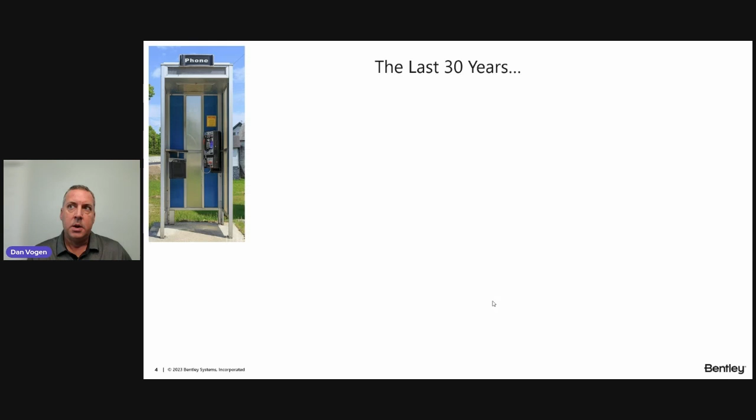Looking at myself professionally over the last 30 years, I've gone through every single one of these communication devices, and how we've got so much power at our fingertips today, how we're able to communicate with the world so seamlessly, and what we're able to do with the computing power in our pockets.

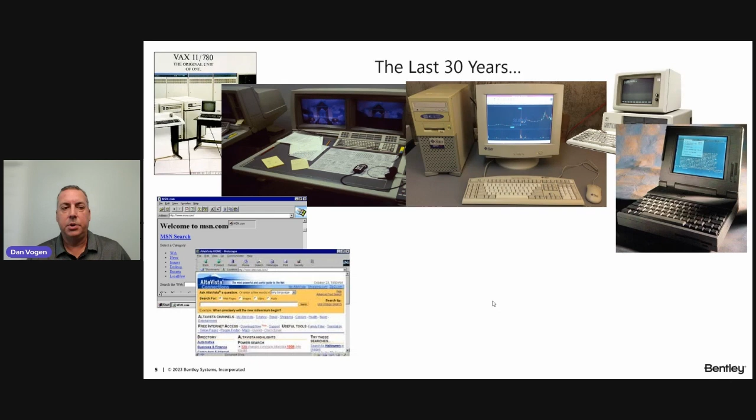From a computing power standpoint too, I've gone through the evolution of all these systems, from working on VAXs originally and different types of workstations, to the first PCs and first laptops, into the internet and email, and now what we do today with Teams and conferences like this. The evolution has been incredible.

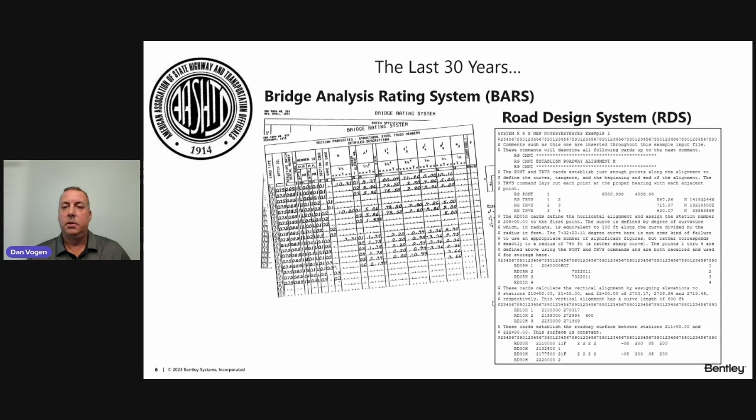From a professional software standpoint, I started as a developer working on AASHTOWare products—first one was the bridge analysis rating system. Today we look at 2D plans, 3D models, and digital twins, but 30 years ago we were working with textual input to define a single beam in the structure, parapets, and overall spans, and then using that for bridge rating. Similar on the road design side, using textual input to define alignments, curvature, and points of tangency.

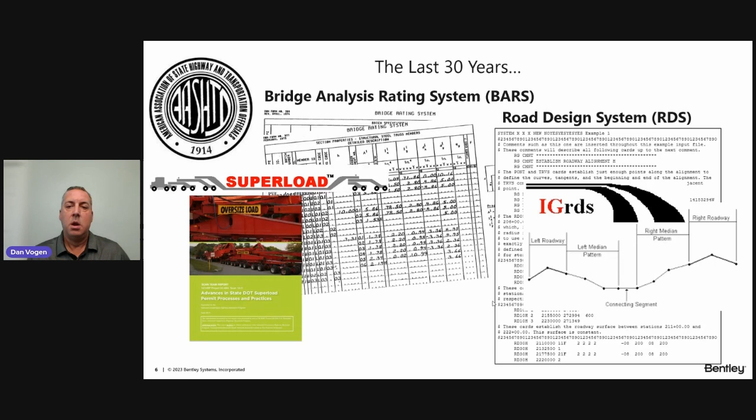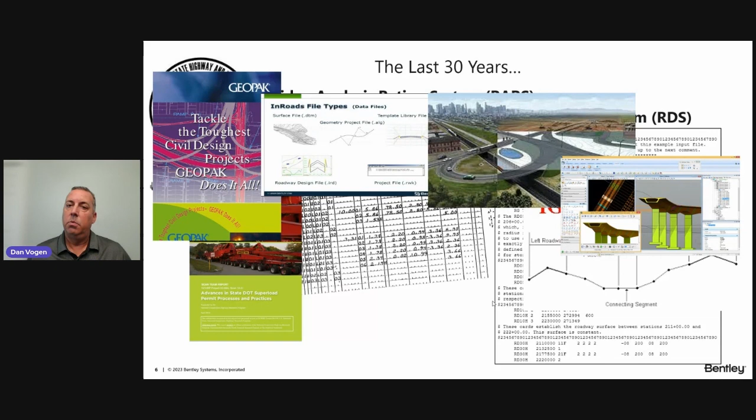Then we got into working with things from an interactive graphic standpoint, where we could see cross sections and side slopes and understand a little more. We combined those things together and kept iterating to be more interactive, more graphical, and more model based. Now we see really detailed 3D models that we work with today.

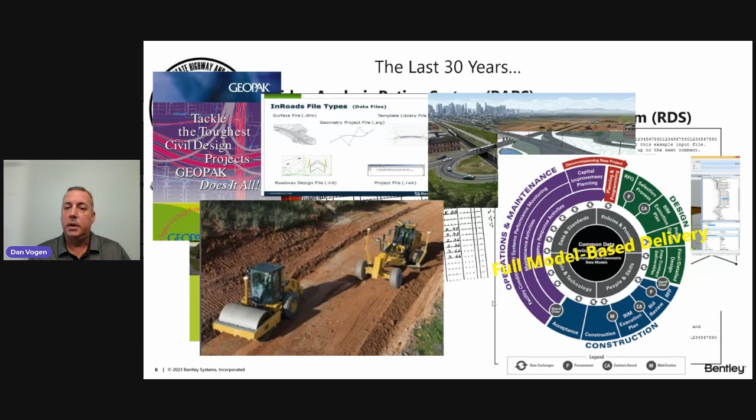That's allowed us to work with things like automated machine guidance and automated control of construction equipment out there. Now we see the Federal Highway Administration really trying to push this along, moving us into full model-based delivery, where the entire life cycle—from design to construction to operations and maintenance—becomes a full model-based future.

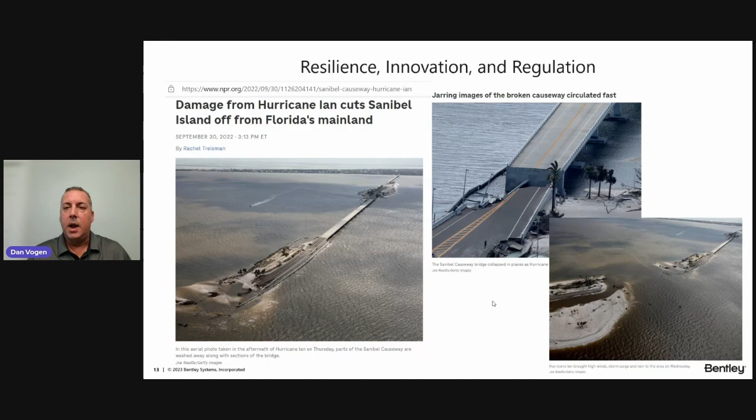We saw in Southwest Florida, late September of 2022, Hurricane Ian came through, massive destruction. Here's some pictures of the Sanibel Causeway. It's a 3+ mile bridge that connects the mainland out to Sanibel Island. There was about 16 feet of storm surge in this area. The structure was resilient overall, but there were 3 spans that were adversely affected by the storm, and the island was cut off from road transport.

The amazing thing here, with the resilience and the innovation that comes into play, this is just from a remediation standpoint: the hurricane came through September 28th. Two weeks later, October 12th, those spans had been repaired, and those structures were open to emergency moves. And 3 weeks later, totally after the storm, the causeway was open to the residents there, not the general public overall.

It took so many people. They said 100 crews worked around the clock. You look at the amount of dirt and rock and 4,000 tons of asphalt that were brought in. But in time of crisis, we found that way to innovate. We found that way to get past regulation, past funding processes and procurement, and we just made it happen. So we can do it when we want to.

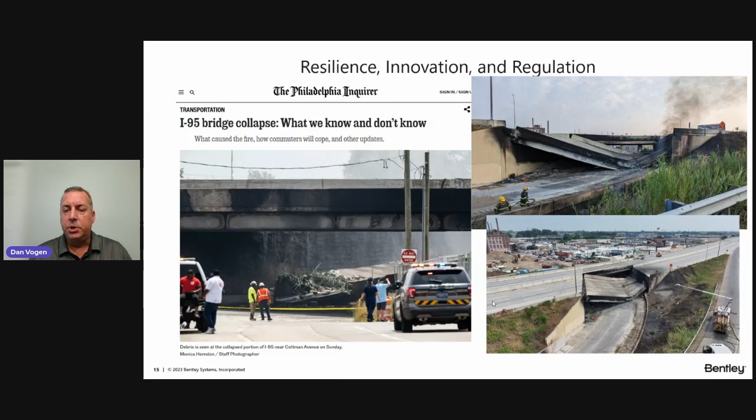Just a similar kind of example here. We saw in Philadelphia the I-95 bridge collapse, and there was a tanker truck that started on fire under the bridge. We lost that structure. June 11th of 2023 that happened, and in 12 days that structure was open.

It wasn't open in its original form. It wasn't all the beams. It wasn't the same design. It wasn't a long-lasting solution necessarily, but it allowed us to deal with this area that has 160,000 cars cross through that area every single day.

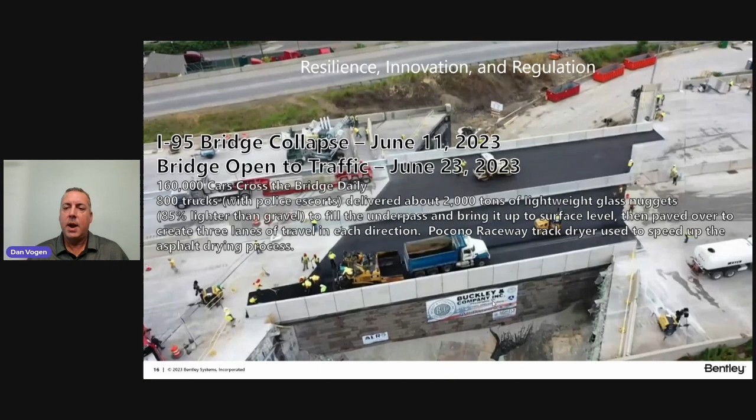And again, it was the extent of work and coordination and collaboration and planning and resilience that would go into this. Different methods with lightweight glass nuggets, and using the Pocono Raceway track dryer to speed up the asphalt drying process. So we can do things more quickly when we're really driven to.

When we look at trends around sustainability, there's a really interesting organization called the Ray, and they're looking at all kinds of things that we can do in our roadways to better prepare for the future, to be more efficient, to be more energy, to be more nature friendly. So one of the big things that they're touting, you see in the picture in the bottom left there, is to try and use the right of way inside of interchanges to install solar developments.

And they say that if we looked at doing that, we would be able to power 12 million electric vehicles a year by the power that could be generated by putting solar developments inside those interchanges. They light them up. They say it's safe.

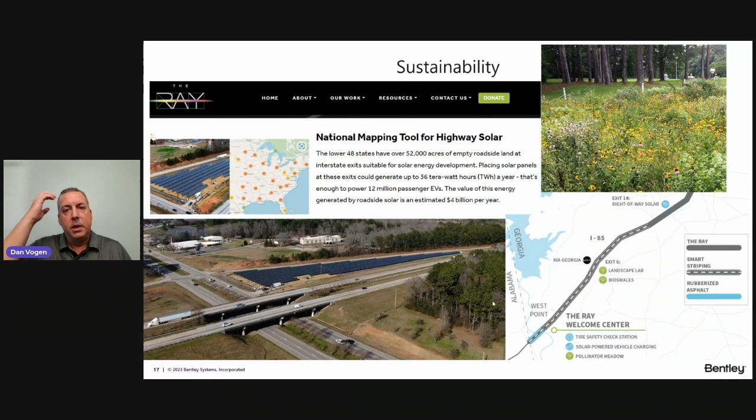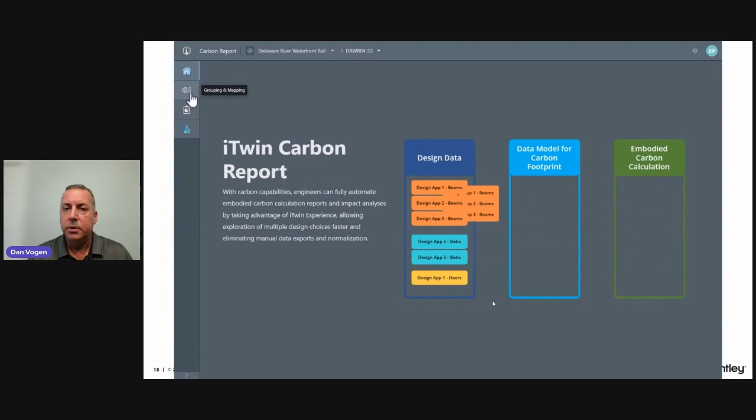And that's a good way to look at land that doesn't go to use today. They've got several other things for pollination meadows and what we need to do with better pavements and being more sustainable overall. We look at greenhouse gases and what we should be doing and what opportunities we have to take into consideration when we look at new designs.

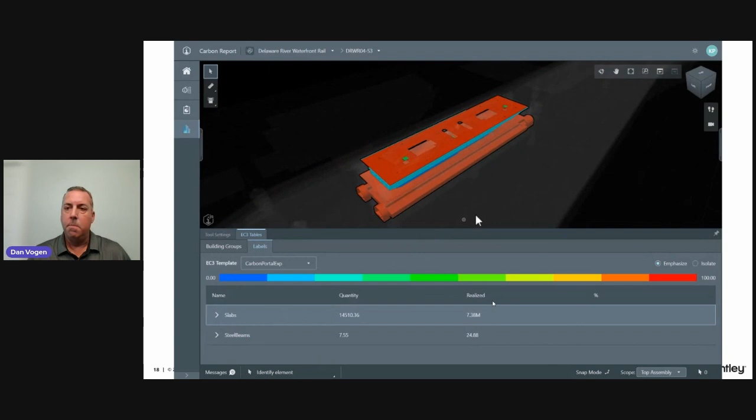I know we've been working with an organization called One Click LCA Limited, and we're able to take models and see the impact of the materials that are used, the design that's used, and identify exactly the extent of greenhouse gases that come into play because of that specific design consideration, whether the form or the materials.

Looking further out into the future, I think that we'll see heavy civil and infrastructure impacted by a couple main considerations: one, new designs for livability or sustainability or resilience, and then new methods for how we address those designs and the construction that has to come into play. Let's look at a couple examples here of how far the new types of designs can be pushed forward, how much we're going to be challenged.

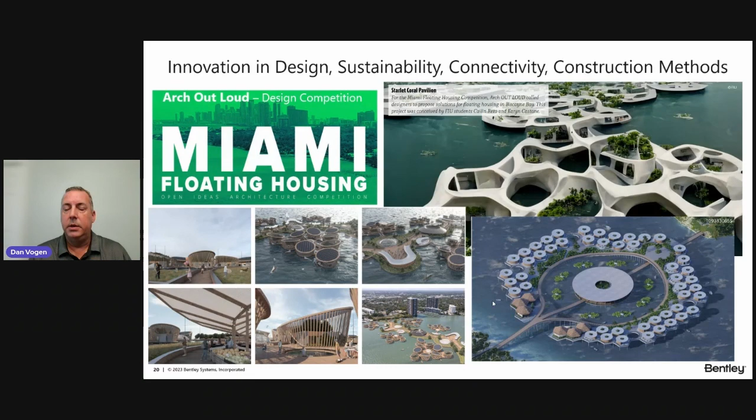These pictures are all from the Arch Out Loud design competition, and they put on different design competitions. This specific one was for Miami floating housing, and they challenged participants to look at what could be done to put housing in this water area of Miami. You can see all the different crazy designs that come into play. This will result in so many changes that are required in how we deploy our equipment, what equipment's needed, and what we do with the building materials and building methods. And that's in an area close to home for most of us, Miami in the U.S.

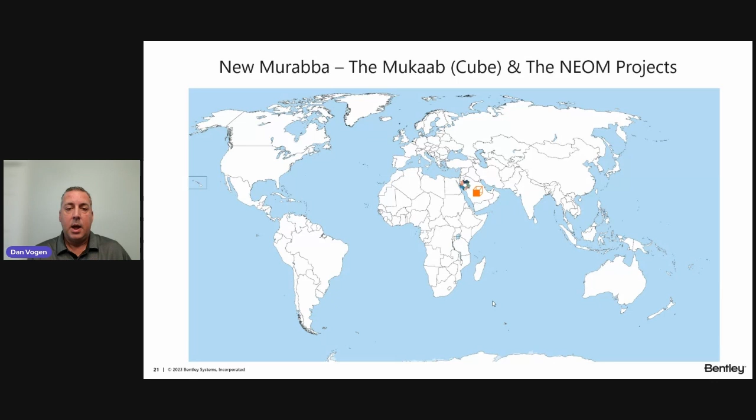We see some really, really crazy things going on in the likes of Saudi Arabia, a couple huge projects there. I want to share a little bit there and see how that will go and challenge us. So I'll let this one video play, and then I'll come back in and show a couple other projects that they have going on.

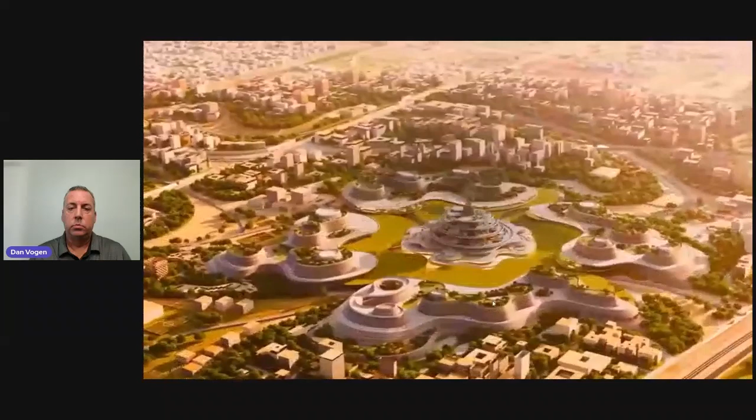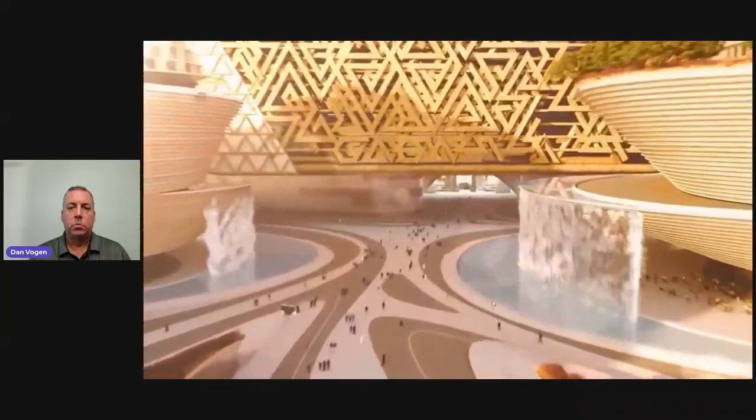Introducing the new horizon for Riyadh, a new icon, the Mukaab, the world's first immersive experiential destination. A gateway to another world. Step inside and it's unlike anything you've ever seen, at a scale that's unprecedented, big enough to hold 20 Empire State Buildings, where you and those around you.

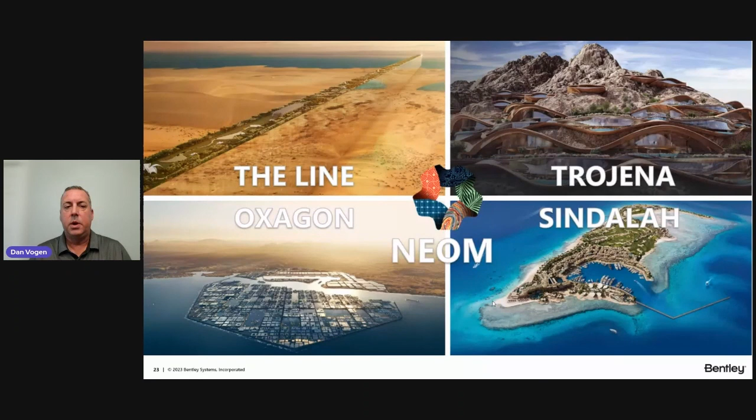So you can look up that project, Mukaab. I mean, crazy. They're thinking about 20 Empire State Buildings in that space.

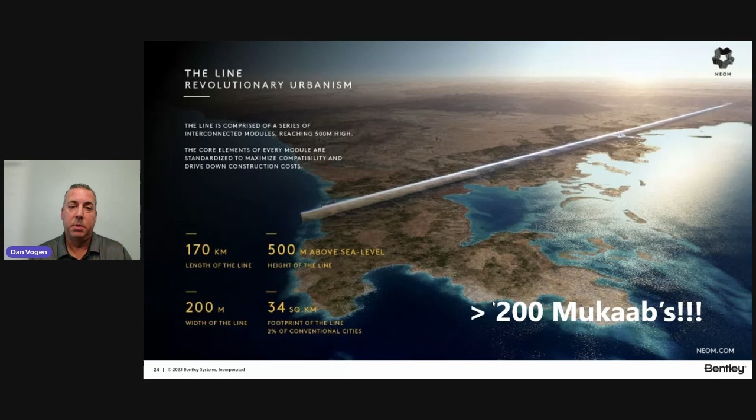But NEOM has several projects going on in Saudi Arabia. One they call the Line, and the Line is 200 meters wide, 500 meters tall, and goes on for 170 kilometers. If I did the math right on this, that will be over 200 of those Mukaab cubes. This is massive. We look at what they try to do, and they try to put all kinds of business and residential and lifestyle activity type capabilities inside of these individual modules, limiting the amount of time to travel for anything that you would want to do, but this goes on for 170 kilometers.

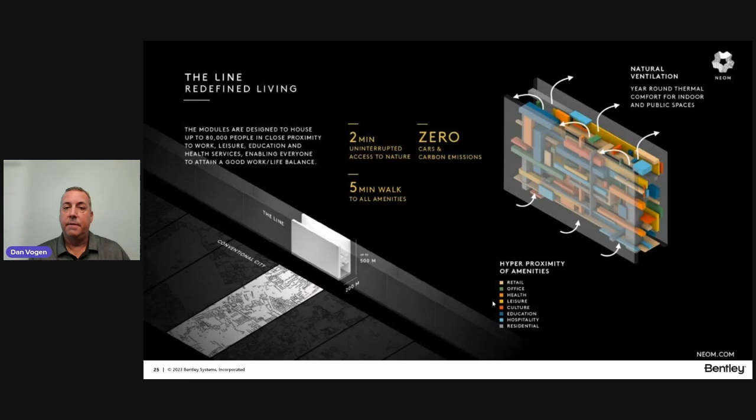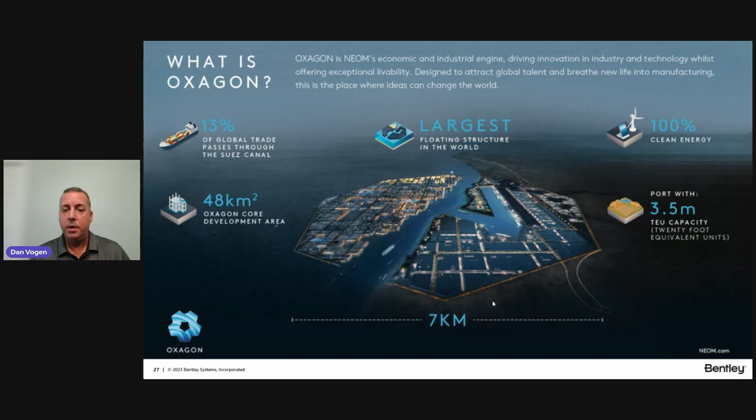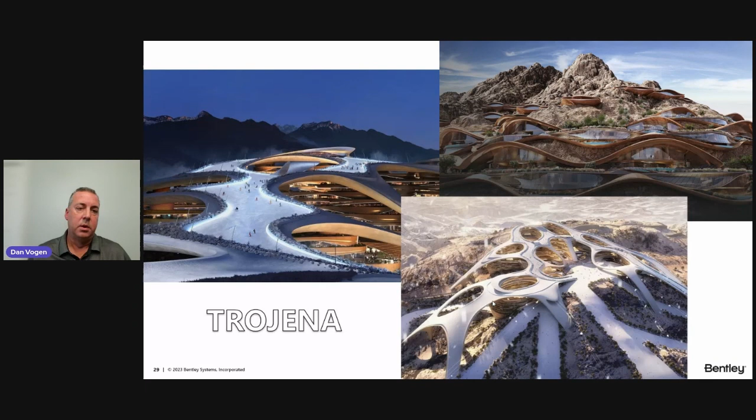You can see a couple pictures here of what they see this design being overall. They're also working on the Oxagon, the largest floating structure in the world, which will be 100% clean energy based, a luxury island, and something that's going to be used for a whole bunch of upcoming events. This Trojena, where it's this mountain and they've got snow skiing in Saudi Arabia. But you can look at the design that goes into play there and the wavy aspect to everything, and what's going to happen with the tools that are used for the design, methods for construction, new equipment that's going to be required.

My company likes to talk about building infrastructure better, and we talk about that from plan, design, build, and operate. I think we not only have to talk about better, but being different and for the future.

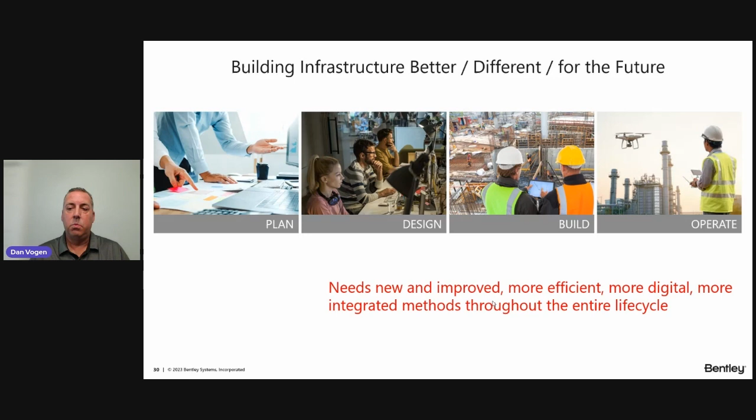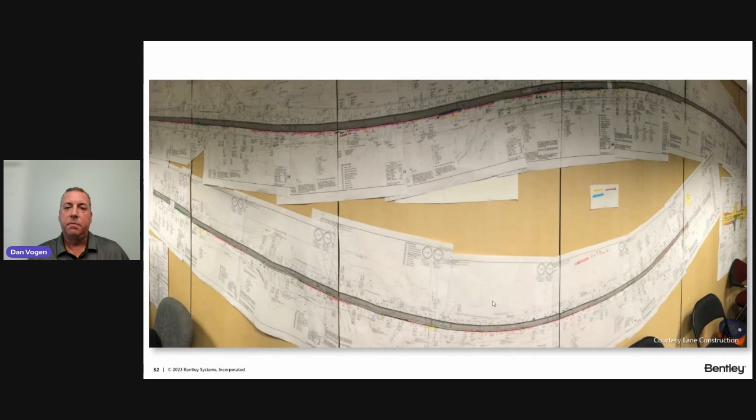There's a lot that needs to change. We have to be more efficient, more digital, and we need to look at more integrated methods throughout the entire life cycle. Gone are the days of huge rooms of drafting and walls of plan sheets, and the need to get to models that provide a better understanding of the entire project.

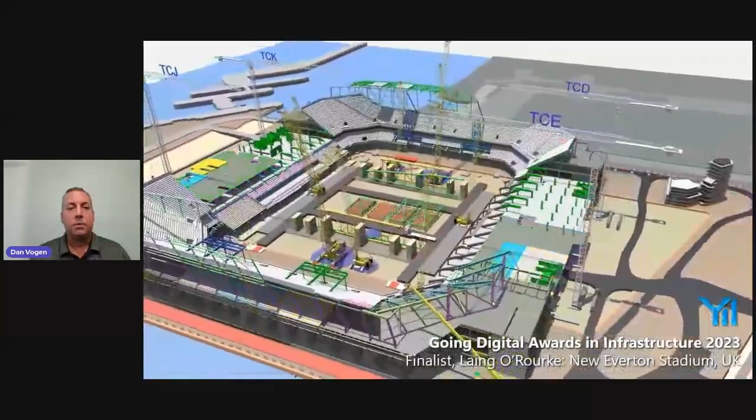We work with a model like this for design, we use a model like this for planning our construction, for looking at any kind of collisions or conflicts that can come into play, where we understand the materials, the timing of material delivery, the movement of equipment around the site, everything that comes into play to adequately and efficiently construct such infrastructure.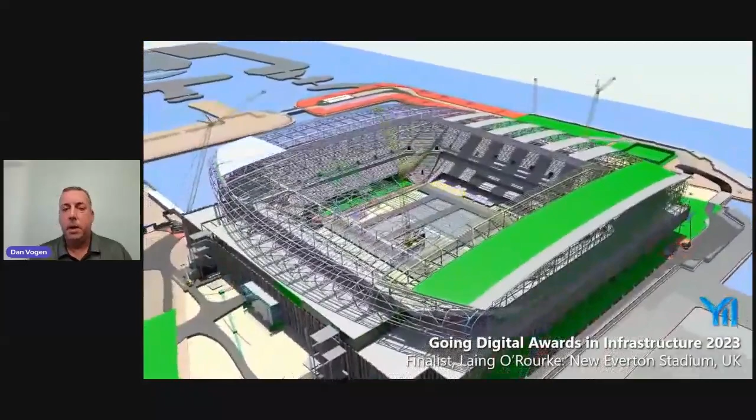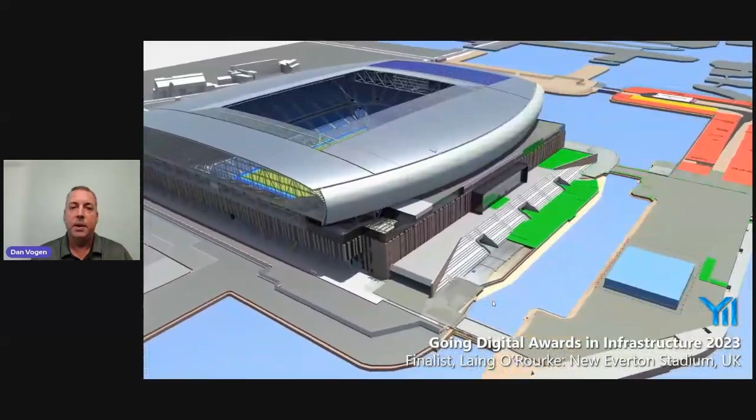The other big benefit is that once we have a model like this used for design and construct, it can then come into play for the whole operate stage of life. We hear about the 80-20 rule: 20% of the cost on design and construct, and 80% for the operation of an asset over a lifetime. So having that information and being able to work with it over time is just as important, maybe even more important, than what we do with our construction processes.

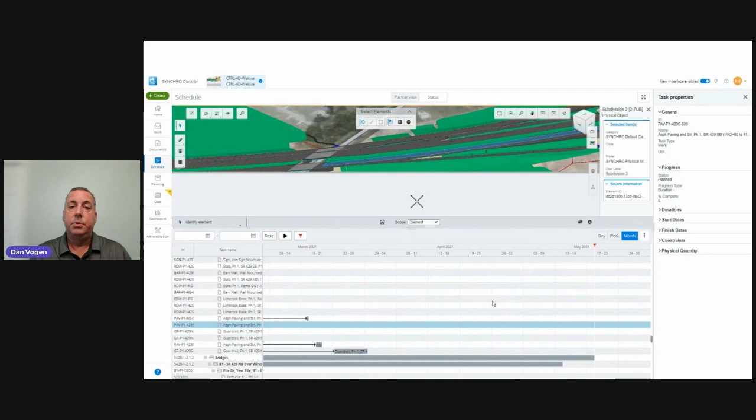We see the exact same kind of tools coming into play for horizontal infrastructure, where we work in road design and have that model, and we can deal with all the details, timing, project management and coordination that comes into play, while also still allowing engineers to go back to the means and methods they're used to, working with cross sections, but having more detail and more of a model-based approach overall.

The good thing is, as we have new employees entering our workforce that are more technologically adept and more willing to try things, we're able to see a much faster adoption of these technologies come into play.

We'll look at things like Spec GPT, where we can have AI geared towards specifications in general, not a general purpose tool like ChatGPT or Microsoft Copilot, but something geared towards getting a detailed specification for, in this case, a roof installation, or Room GPT, where we can simulate what a design is going to look like.

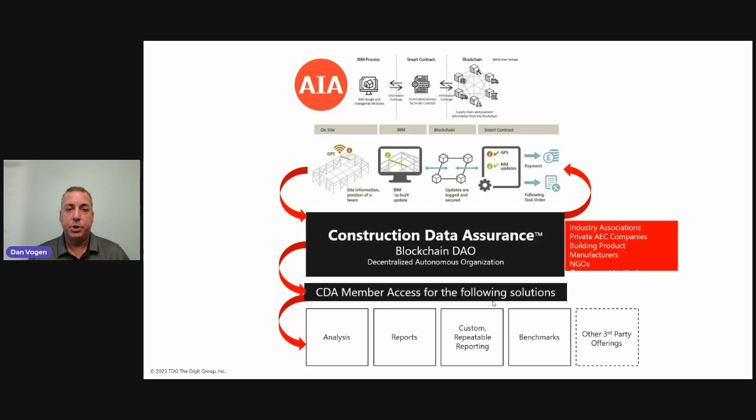We'll see significant uses for IoT, the Internet of Things, a lot of sensoring type options and capabilities, throughout the entire life cycle, from early on in construction and project monitoring, to assessing site safety and health, to seeing that assets in place are working well and haven't become incapacitated in any way, to alert and reporting systems. So our infrastructure and overall development will be that much smarter.

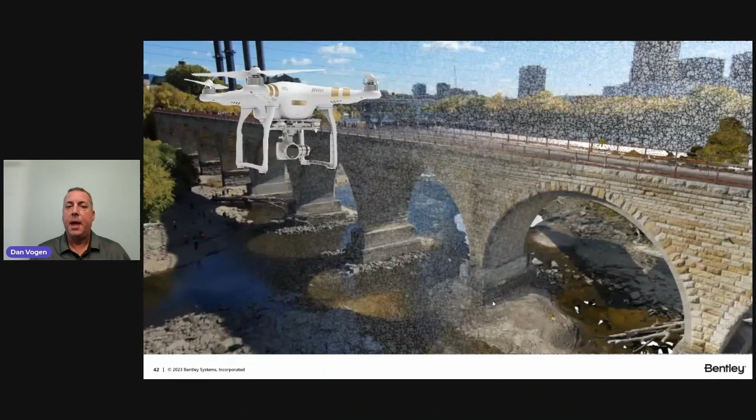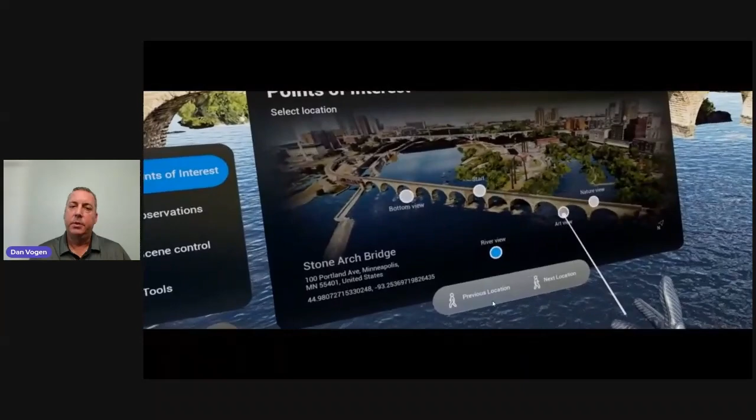When we've got these kinds of models, it allows us a new way to interact. We can kind of teleport ourselves into a situation. Here we see with a detailed model of a structure that we can be right at that structure and assess conditions and understand what is happening with that asset. We can get super detailed information and understanding about condition, and do an inspection from models that have been created all from photographs.

This isn't video, this is an actual model. It's a video of a model that's been created purely from photographs.

I think that allows us to look at a couple other areas, specifically like workforce. We talk about a shrinking workforce and how we need to be more productive and more efficient. I've used this slide a couple times in the past.

Three pictures of three different conditions here, where these three people are probably not generally employable in our inspection and construction field inspection type work. A lady in a wheelchair, maybe a really well trained engineer, is not able to get into the positions she needs to be able to inspect and analyze and project manage.

With some of these digital twins, she could be out there. The lady in the middle maybe has been out there and done all this field work in the past, but her condition as a pregnant woman right now doesn't allow her to put herself at risk that way.

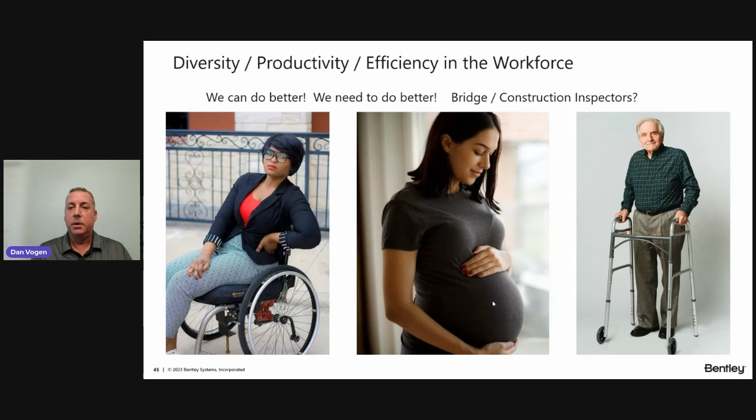And the gentleman on the right, he may have done this work for 40 or 50 years, and right now, from crawling around and through bridge beams and all over, his body physically limits him from being out there. But he's got all this experience that we need to leverage, and how we can teleport these individuals into those environments can be extremely valuable.

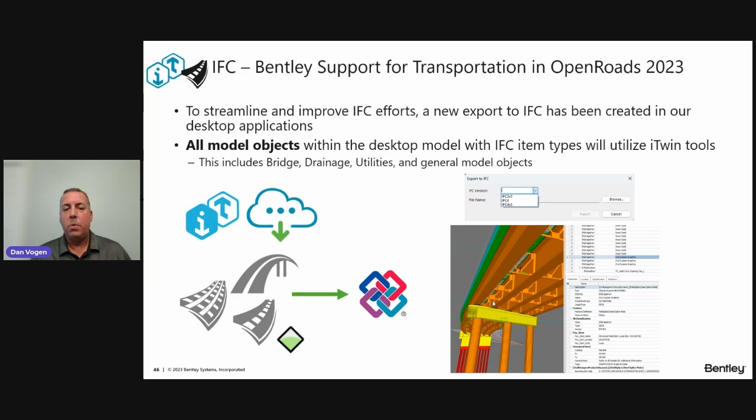One of the last main things I'll hit on is about a level of openness and data sharing. IFC is really big - that's industry foundation classes - it has to become something bigger and more foundational, really allowing data to be shared between vendors, between solutions across the entire life cycle.

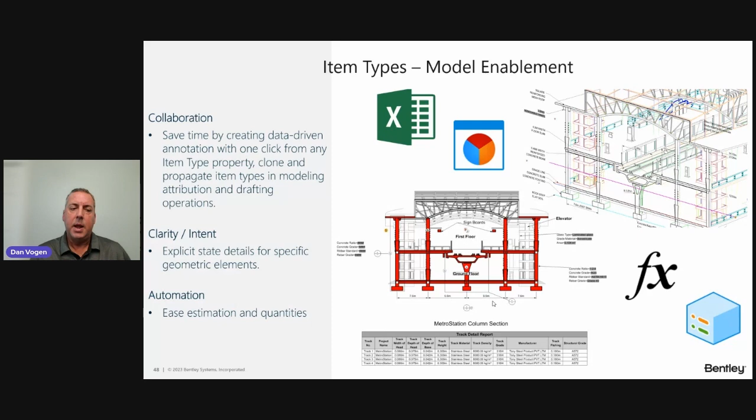So what we do in making the data, the information more available, allowing collaboration, allowing clarity and intent of what specific images are, specific items in a plan are, and helping out with automation overall.

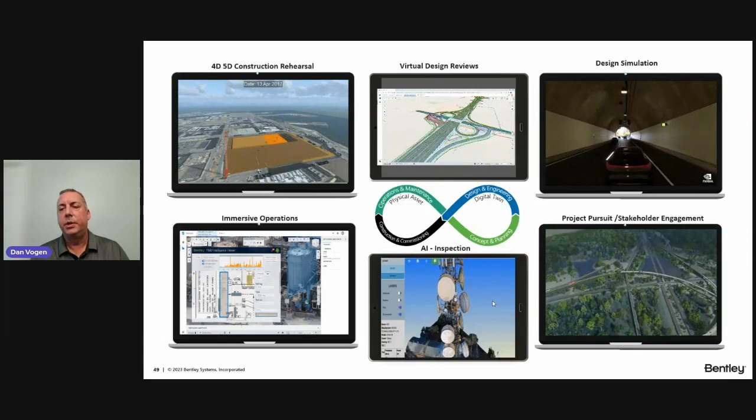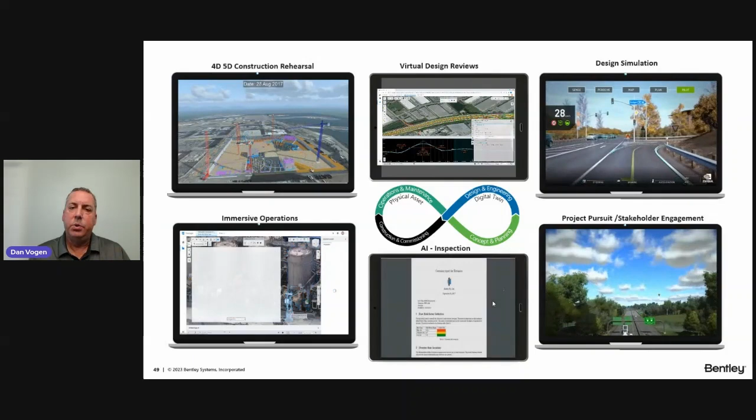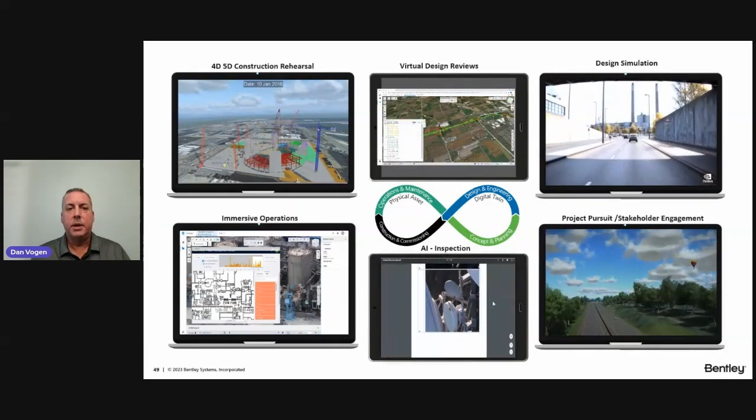Now we see so many advances here, so many things that will continue to grow and be affected by technology - how we go and market new engagements to the general public and show them what we're intending to do with our heavy civil and infrastructure work, simulating that, working with design reviews in new ways on models and not just on 2D plan sheets, going through the construction rehearsal and making sure everything's going to be on site and what has to be updated based on time, using those models then in the future for inspection and different types of immersive operations.

We see the beginning of this. We're starting to see benefits with different projects, significant savings on like this Elk River job with digital delivery, avoiding network relocation costs and additional time for projects based on digital twins of the development, and doing the construction pre-planning and rehearsal, saving in field inspections.

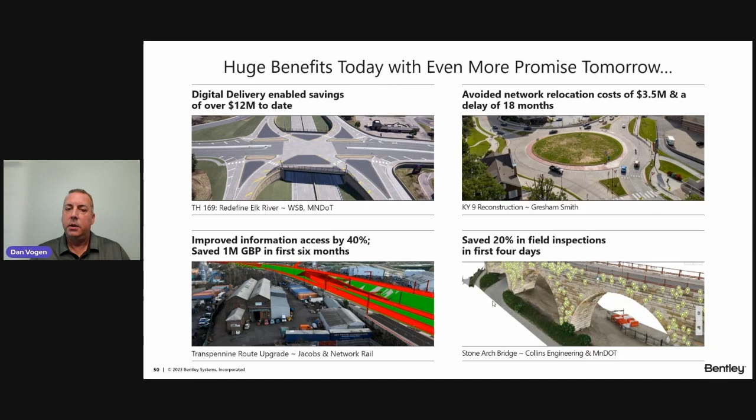So over and over, we start to see examples, places where all of us can come in and work the challenges and use the different trends and opportunities for what we see as possible here. So I think wrap up here.

Tomorrow, the day after, this year, next year, we're going to see more of this: 'Hey, road design GPT, here's some real specific considerations - give me a digital twin of this with all of my estimated quantities and all the construction phasing, and a model that could be used for operations.'

We'll see the infrastructure we're putting out there being that much smarter and providing alerts when different situations occur. We'll have more detail, like a pavement section here, where we not only identify that there's a condition there, but that we've got more historical information about when we installed that and what the conditions were, and if there's other things we need to correlate with and look into because they may be related.

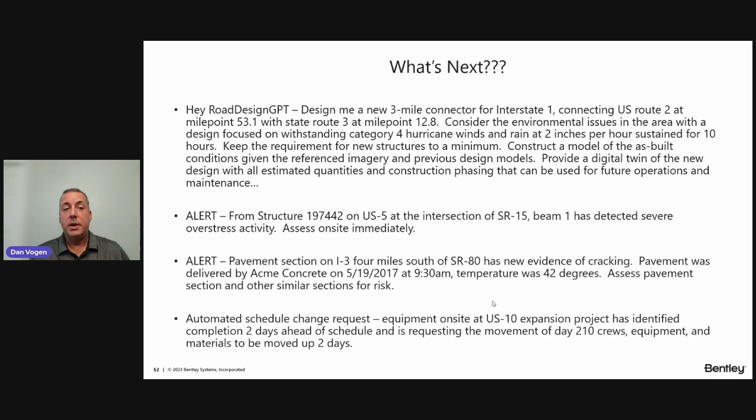And then we'll see just more about the smart infrastructure, the IoT here coming, that we've detected there's equipment on site, or that we've got materials there, or that we're ahead, we're behind, and how we need to dynamically change the plans we're working. So, a ton going on today. I think we will see such rapid advances here because of the willingness of this next generation of workers to adopt the technology and allow us to really take it forward.